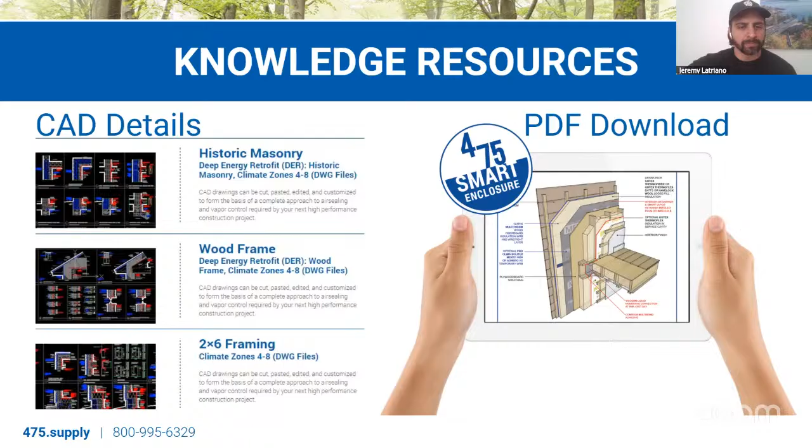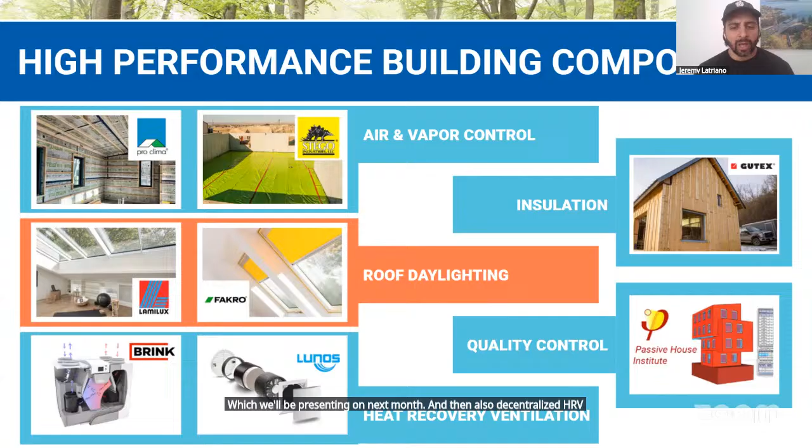At 475, we supply a variety of different solutions: air and vapor control through Pro Clima and Stego, insulation through a German manufacturer Gutex of wood fiberboard insulation products. And when we build to a very high degree of air tightness, we need to ventilate mechanically. So 475 supplies centralized ERV systems through Brink, which we'll be presenting on next month, and also decentralized HRV solutions through Lunos. But today I'm here to talk to you about our roof daylighting product specifically.

To learn more about our roof daylighting products and see a variety of different photos, project examples, blog posts, etc., I recommend checking out our Daylight website, 475daylight.com. I'll get into more about these products towards the end of the presentation, introduced via a case study on our new headquarters. But for now, I just want to give you the URL and encourage you all to check out the website when you have a chance.

So getting into the presentation, high performance roof daylighting. As a starting point, we like to define some of the terms we'll be using frequently in this presentation, starting with high performance - something we reference very often, something that's in our company name, but something that's kind of vague in general. So generally when I give this presentation, I like to open it up to the group and ask you to give some characteristics of what you would expect from a high performance building. If you are so motivated, you can do so in the chat and I'll call out some of your answers.

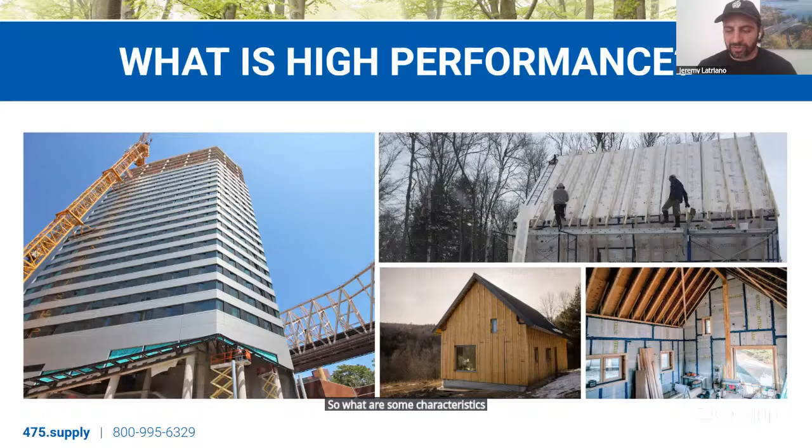So what are some characteristics of high performance buildings? Well, at 475, some of the characteristics we expect from high performance buildings are listed here. I see Vincent in the chat mentioned no leaks - that's a big one. Both water control, stopping water leakage which would affect the durability of the structure, and also air leaks - preventing drafts and air leaks through very high degrees of air tightness is the most effective way we can reduce heating and cooling demands.

Reducing air leaks will also have disproportionate effects on vapor control and thermal control. So yes, no leaks is definitely something our company advocates for strongly. Eliminating leaks and insulating continuously will also provide for very high levels of comfort. So high performance buildings are generally very comfortable when we reduce or eliminate drafts and have continuous insulation with minimal thermal bridges - we have very consistent interior surface temperatures, eliminating cold spots and temperature asymmetry, creating a very comfortable interior.

In addition, because these high performance buildings provide a very high level of air tightness, we're able to regulate very intentionally how much air enters and exits our building, and we're able to bring that air in through our mechanical ventilation system, thereby continuously filtering that air while also exhausting stale air. So these buildings generally have very high indoor air quality and more healthy interiors for that reason.

Perhaps an obvious one, but energy efficient is definitely something high performance buildings offer. When we air seal continuously and insulate continuously, we're mitigating heat transfer through the enclosure, which reduces strain on our mechanical heating and cooling systems.

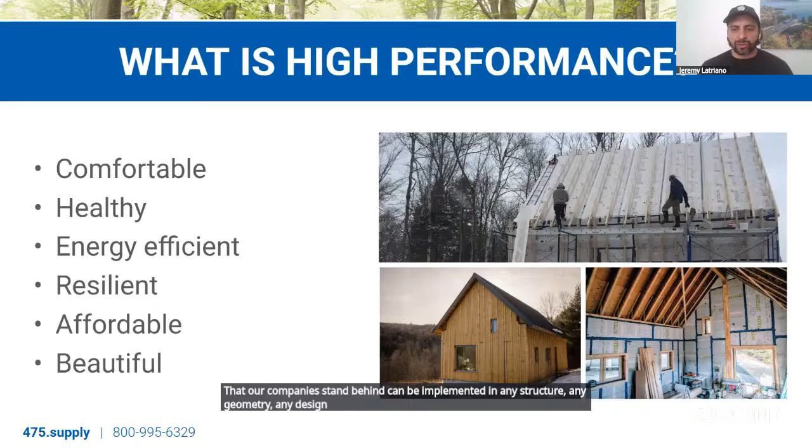And then beautiful - there's no reason high performance buildings can't be beautiful. All of the principles that we advocate for, the passive house principles our companies stand behind, can be implemented in any structure, any geometry, any design for the most part. So there's no reason high performance buildings need to be limited in their design.

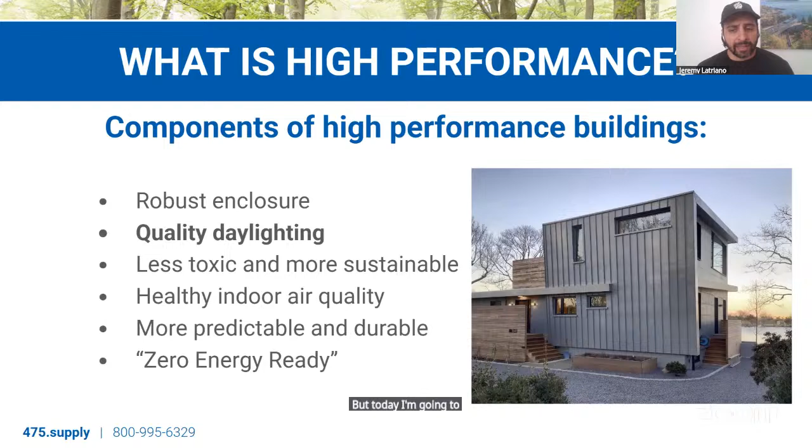There are various components of high performance buildings that allow us to get these high performance results. You can see them listed here on the slide, but today I'm going to talk primarily about quality daylighting. Let's go ahead and define that term in our next slide.

Just defining some of these elements of quality daylighting quickly: one, we want to ensure when designing for quality daylighting that we have a balanced window to wall ratio. Anytime we put a penetration in our enclosure, whether for a window, door, or skylight, which we're going to talk a lot about today, we are inherently weakening the thermal performance of this enclosure.

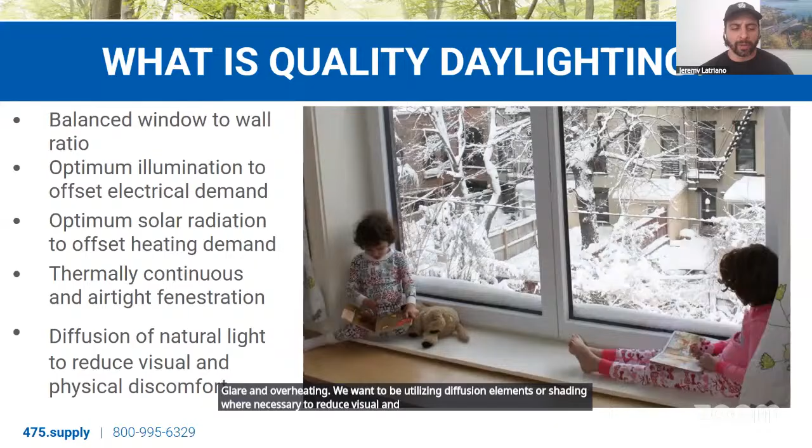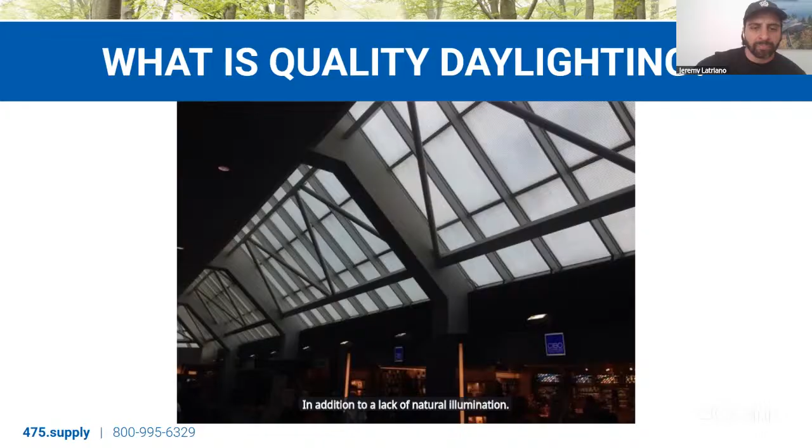So why do we utilize daylighting in architecture and construction? There are a variety of benefits, but one of them is health and productivity for our tenants. As human beings, we are very in tune with our circadian rhythm, which allows us to feel more energized during the day and sleep better at night, and is largely reliant on the pattern of the sun and light throughout the day in order to be reinforced effectively.

So when we have access to natural light in our day to day, we'll feel more energized at work, more rested at night, and it'll definitely benefit us physically and cognitively.

There are various examples of the benefits of natural light, such as students who have access to natural light during exams being shown to be more attentive and perform better. Shoppers at retail locations with access to natural light tend to spend more time in store and spend more on products. This is partially because of the pleasantness of shopping in a place with natural light, and partially because natural light allows us to see the full spectrum of visible light, which lets us more accurately visualize the colors represented in a given product.

This same quality of natural light and its ability to let us visualize the full spectrum of visible light also creates excellent aesthetic and architectural benefits. Natural light allows us to capture very specific qualities of light within a space and really give a space a specific feel based on how we introduce natural light into it.

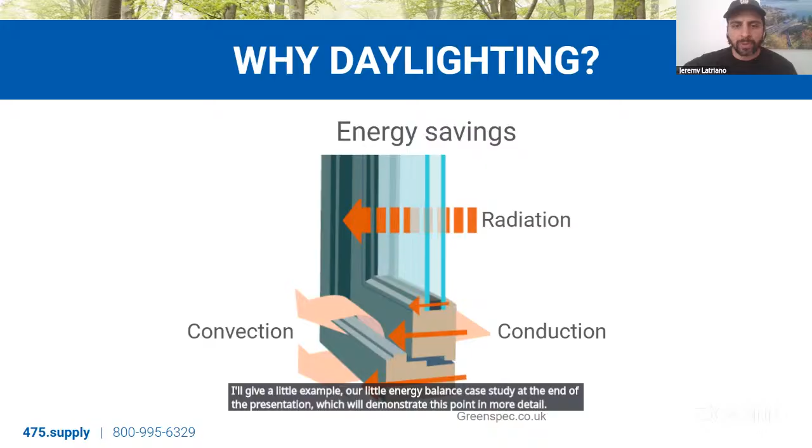So why roof daylighting specifically? Well, roof daylighting skylights are ideally positioned to capitalize on the benefits we've already discussed: health and productivity, aesthetic and design, and energy savings. Because they're positioned on the roof, oriented directly towards the open sky, they receive much more direct daylight and much more light in general throughout the day and throughout the year.

In addition, skylights in particular are well suited to capitalize on the benefits of natural ventilation, both by taking advantage of the stack effect, or the tendency of warm air to rise in our buildings when it's able to escape from higher stories, and also by capitalizing on nighttime flushing, particularly relevant in shoulder seasons to flush heat at night and reset our mechanical systems for when the space is in use the next day. Finally, skylights, particularly in urban applications, are ideally suited to allow for exterior access by opening up towards the roof, which could be difficult to achieve in particular urban locations without providing that access.

So here we have a nice image of a LAMILUX product, the Comfort Swing, which is featured on our office here at 475. I'll talk a little bit more about this product later in the presentation. But essentially, because of this product, we have access to our roof deck — a connection to the outdoors that we would not be able to achieve without a roof daylighting element.

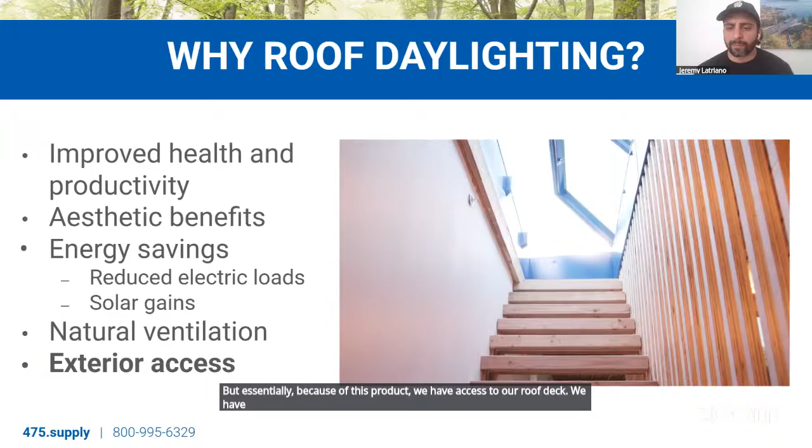So let's look a little closer at the relationship between skylights and windows. Because skylights are positioned towards the open sky, they are better situated to receive direct light and more illumination and heat throughout the day and throughout the year. For this reason, skylights can be much smaller than windows while still capturing similar amounts of light.

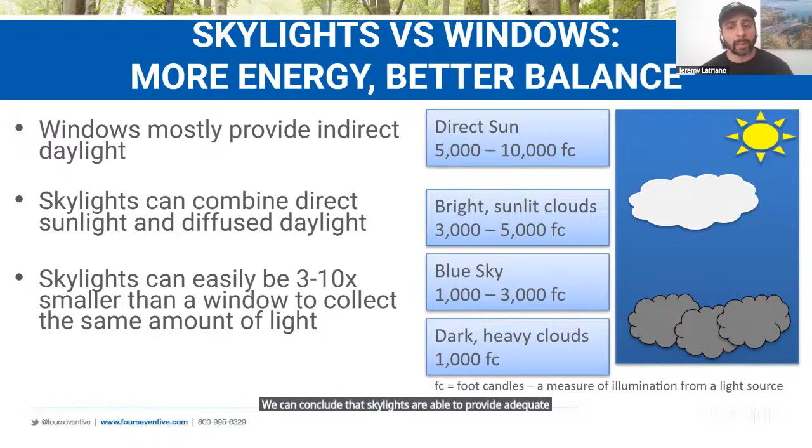In the image on the right, we can see the illumination from the open sky in various weather conditions. On a direct sunny day, illumination is typically measured at 5,000 to 10,000 foot candles from the open sky. But even on a stormy, dark, heavily clouded day, we still get illumination from the open sky around 1,000 foot candles. When we consider that office work typically requires less than 100 foot candles to complete comfortably, we can conclude that skylights are able to provide adequate illumination to significantly impact our electrical demands and thereby the energy usage of our buildings.

Windows, generally speaking, as a rule of thumb, allow light to penetrate about 2 times the head height of the window into the interior space. In the image at the top right, you can see a window in an open space, and that window is allowing for some natural illumination, but primarily in the spaces directly adjacent to that window. If we add a clerestory or a light shelf to the window, we can reflect light deeper into the space, about 2.5 times the head height of the window approximately.

But we're still not able to evenly illuminate the space as much as we might want to. People directly adjacent to this window will have great access to natural light, but as we get deeper into the space and further from our exterior walls, that natural illumination will not be as present. When we utilize skylights evenly throughout a space, particularly with splayed light wells or curbs that allow light to penetrate deeper into the interior, we can evenly distribute light throughout the interior, even to spaces that might not be directly adjacent to an exterior wall. So skylights can allow for natural light to reach spaces that might otherwise be difficult to achieve.

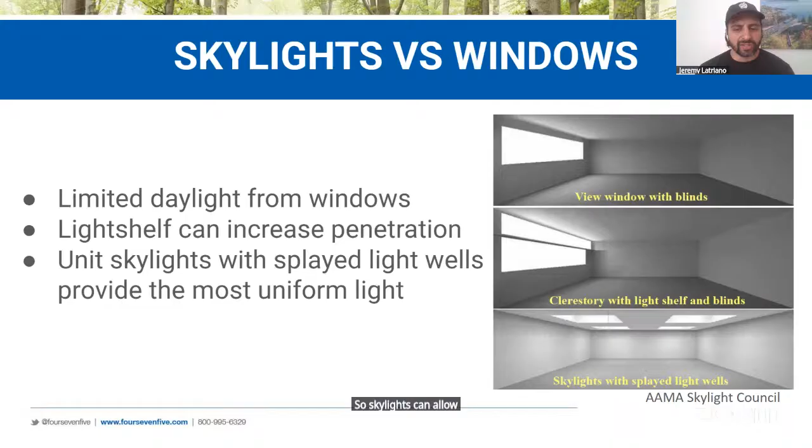However, there are certainly common problems associated with roof daylighting. Because they do get so much direct light, they are susceptible to over illumination or glare, which can create visual discomfort and make it difficult to complete work comfortably, or even to just rest comfortably.

In addition, this exposure can create overheating, particularly in the summer, as we gain solar radiation that can negatively impact our cooling demands. In addition, if our skylight solutions are not thermally broken, we have very warm exterior temperatures in the summer, and that heat can be transferred inward, which will also have an impact on interior comfort and cooling demands. In the winter, we can see the opposite effect, where we have very cold exterior temperatures. If our skylight is not thermally broken, we can see heat rise to our ceiling level and then be transferred outward via the skylight assembly.

What can occur when exterior temperatures are quite cold is condensation, as the interior surfaces of a skylight can become quite cold when the solution is not thermally broken. Since we're spending most of our time in the winter indoors cooking, cleaning, showering, breathing, we're generating lots of moisture. This warm, moist air at the interior will rise again, come into contact with this cold interior surface of the skylight, and can then condense and create condensation — sometimes perceived as a leak, but often this moisture is in fact due to the effects of heat transfer and thermal bridging.

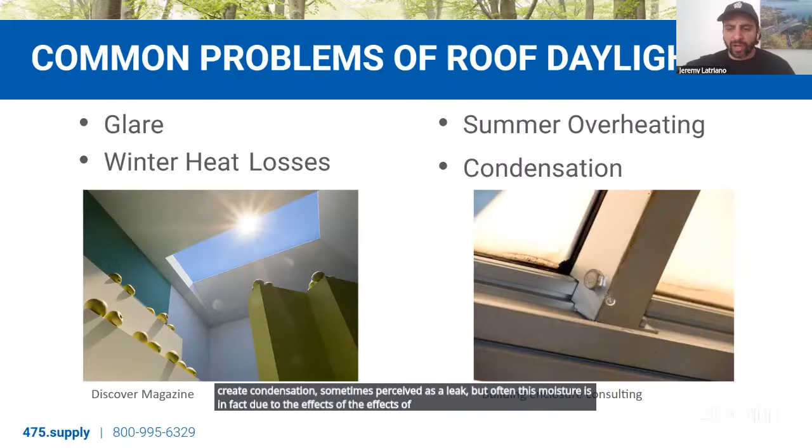Looking a little closer at some of these comfort drivers, first, uniform surface temperatures. Here we see an example from Nick Grant. He was in his office and the air temperature was 23 degrees Celsius, which is a little warm, but right around room temperature. However, Nick felt like there was a radiator on in the space and he couldn't figure out why.

So he took out this thermal imaging camera and photographed the skylight on the left and the windows on the right. What he realized is that the interior surface temperatures of these fenestration elements were much warmer than the surrounding air temperature. This is because we're most likely in the summer season, so exterior temperatures are very warm. Because the skylight and windows are not thermally broken, that heat from the exterior is transferred inward, making the interior surfaces much warmer than the interior air temperature, and that heat radiates inward, creating the effect of a radiator or heat source.

Here we can see that the interior surface temperatures of these fenestration elements were measured at 50 degrees Celsius, and just below that number, which is almost twice as warm as the air temperature in that space. So this is problematic for comfort and also for energy usage.

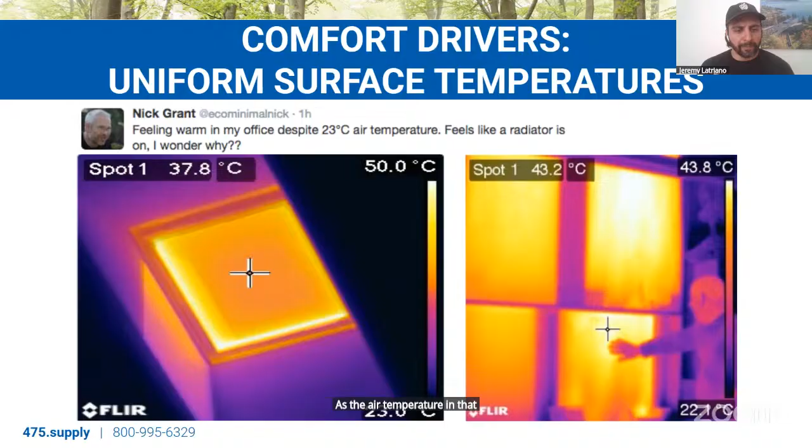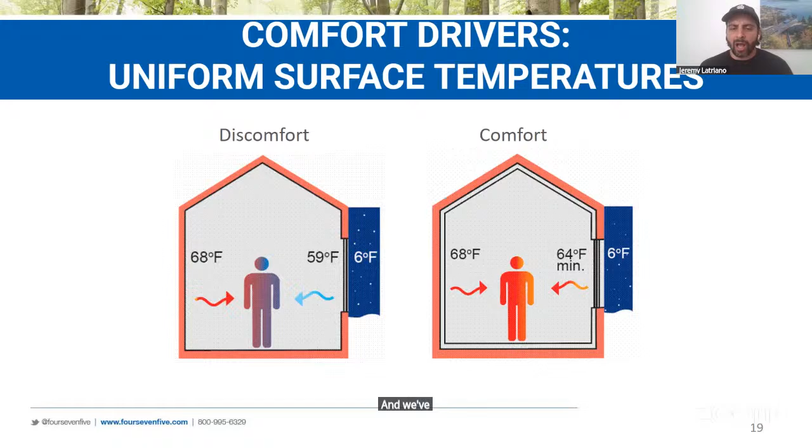I want to talk a little about design considerations for skylights and fenestration in general, starting with detailing. Fenestration, skylights, windows, and doors are unique in that they're really the only element in our enclosure providing for all four control layers.

Getting into those control layers, in order of importance, they are: water control. If we can't prevent water leakage or water from entering our structure and interior, our buildings are going to be barely habitable. They're not going to be durable or built to last, and they're really not going to be serving their primary purpose.

After water control, air control is of next most importance, because as mentioned at the beginning, air control has the most significant impact on heating and cooling demand and will also disproportionately affect vapor and thermal control. After air control is vapor control in order of importance. We won't get too much into vapor control here because fenestration is typically vapor closed, and vapor movement isn't a big factor once we've eliminated air movement. However, we do want to be considerate of thermal control and how we connect our thermal control in our opaque assemblies to our fenestration, to provide thermal continuity and minimize thermal bridging.

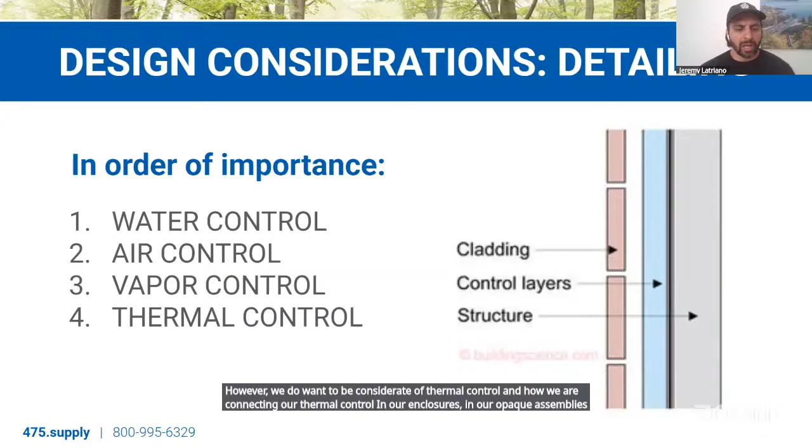What's nice about the Lamilux skylights specifically that we supply is that they're available with insulated curbs as part of their assembly. This insulated curb allows for simple and intuitive detailing for connection of the control layers in our roof to our skylight. As we can see in this section drawing, the insulated curb of the skylight is set down on the roof deck or sheathing, and the exterior insulation just outboard of that sheathing runs directly into the side of the Lamilux's curb.

This will ensure that the thermal control is continuous from the roof to the skylight curb, and since the Lamilux skylights are thermally continuous with insulation at their frames, warm edge spacers, and triple layer glazing, we can be confident that thermal continuity will continue over the full roof opening.

This blue line at the exterior of the section drawing is a roofing membrane, or primary flashing control layer, or water control layer. This membrane runs from the roof and connects directly to the side of the curb, terminating about 1 inch from the top of the curb, just underneath the skylight's drip edge. That ensures we are continuously watertight from the roof to the skylight assembly. Since these skylights are extremely airtight and watertight, we can be very confident that our install will perform and provide water control throughout the lifetime of the product.

At the interior, which is 475's recommended location for an air control layer, the Intello Plus is specified and called out with this red line running at the ceiling up to the base of the skylight. Again, because these skylights are airtight and because we have this insulated curb, all we have to do to ensure continuity of air control between the roof and the skylight is connect our air control layer, in this case the Intello Plus airtight membrane, to our curb at any location.

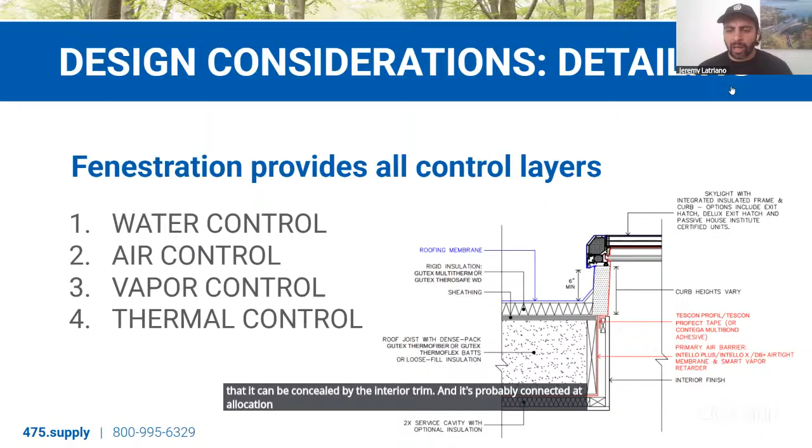Looking a little closer at thermal control specifically, placement and alignment really matters. Here we're looking at an example of a window installed in the same wall assembly, in 3 different positions within that assembly. For this example, we'll assume the thermal control layer, or insulation layer, is centered in our wall assembly. So we want to align the thermal control layer in our window, assumed to be thermally continuous, with the thermal control layer or insulation in the surrounding wall.

In the image on the left, we can see this is a thermal model. Each color shown here represents a different temperature strata, and we're basically looking for any indicators that thermal bridging is occurring, which would be shown by colors kinking, bleeding, or moving through this wall assembly and window.

In this example on the left, where the window is installed outboard in the wall assembly, we can see there is some heat transfer occurring between the thermally continuous window and the thermal control in the wall assembly, because the window is out of alignment with that thermal control layer. So thermal bridging occurs around the perimeter of the window, and we see cooler interior surface temperatures for that reason, which could indicate thermal asymmetry, creating discomfort, and potentially, if significant enough, condensation.

In the example on the right, we've now set the window all the way inboard, but the same problem persists. The window is out of alignment with the insulation in the wall, so again we're experiencing significant heat transfer between the window and the wall assembly, and we're compromising the thermal performance of this install.

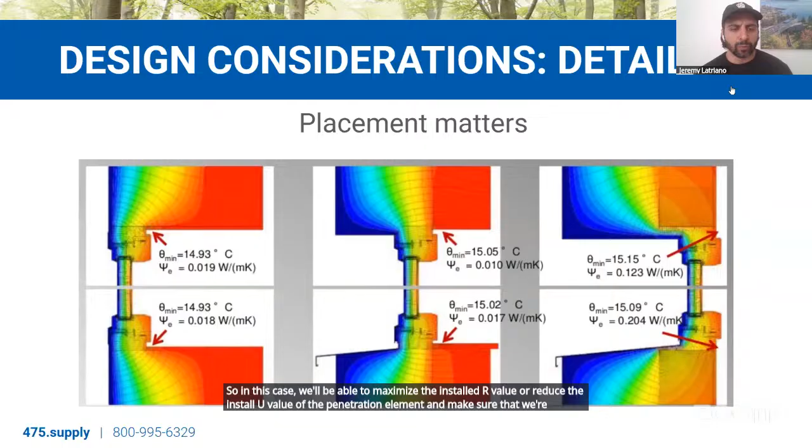So the same principles apply to skylights. Here we see the Lamilux FE skylight, a very similar section to what we looked at previously. The Lamilux FE skylight is thermally continuous, so for the most part there's no thermal bridging occurring through that assembly. In this example, the insulated curb of the skylight is embedded in the exterior insulation of the roof structure, and for that reason this install is thermally continuous. Again, our interior surface temperatures are maintained throughout the roof opening and our exterior temperatures, so very little thermal bridging occurs either through the skylight assembly or between the skylight and the roof.

So in order to optimize thermal install values, the first step would be utilizing a thermally continuous solution. If we don't have a thermally continuous solution, I won't say it doesn't matter how we align the window or skylight, because there still will be performance differences in where it's placed. But overall, the solution won't provide for thermal continuity, so we'll experience some heat transfer over the opening. Once we've specified a thermally continuous solution, we just want to align the thermal control layer in the skylight with the thermal control layer in the roof, and those insulated curbs make that part quite simple.

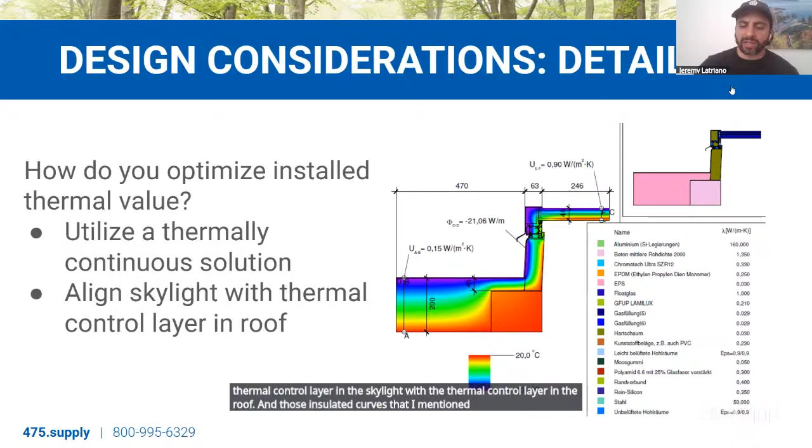Thinking a bit about U values and some product considerations for fenestration. U values for a window, door, or skylight are a weighted average of each element or material in the assembly. Generally speaking, the U value for the glass is going to be significantly less than the U value for the frame. So when sizing our windows or skylights, we want to consider this, and that larger skylights, which will have the frame representing a lesser percentage of the overall assembly compared to the glass, will generally have a lower U value than smaller units.

So in addition to the glass and the frame, we also want to consider the spacer. For a high performance solution, we want to select something with a warm edge spacer, a spacer made from a non-conductive material, which will prevent heat transfer from occurring between the frame and the glass.

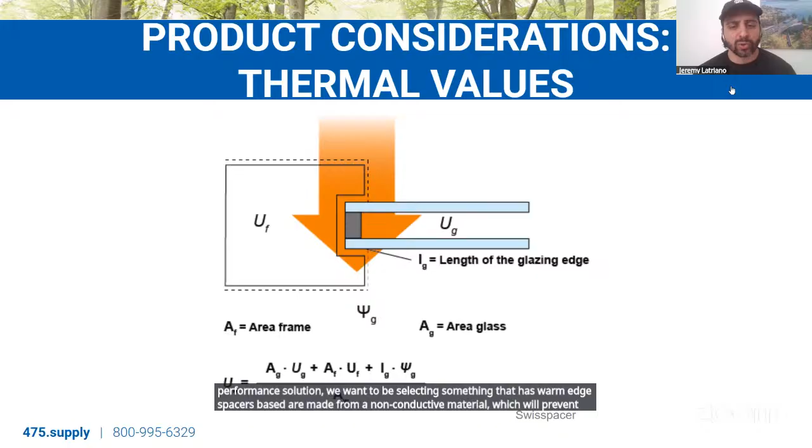So what does this look like for a skylight assembly? Again, looking at a Lamilux FE, which is a thermally continuous solution that virtually eliminates thermal bridging, we can see the triple layer glazing with exceptionally low U values. This glazing is always specified with a warm edge spacer, so we can be confident that we're mitigating thermal bridging between the glass and the frame. The frame itself is aluminum at the exterior, but insulated continuously at its core, so we're reducing or mitigating heat transfer through that frame, which will significantly reduce or almost eliminate the possibility of condensation, as well as maintain consistent interior surface temperatures. Finally, these skylights are prefabricated on insulated curbs, which ensures we are thermally continuous from the skylight to the surrounding roof.

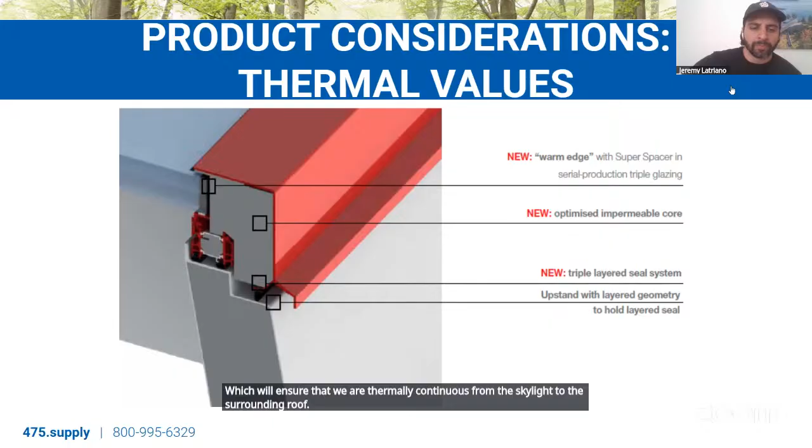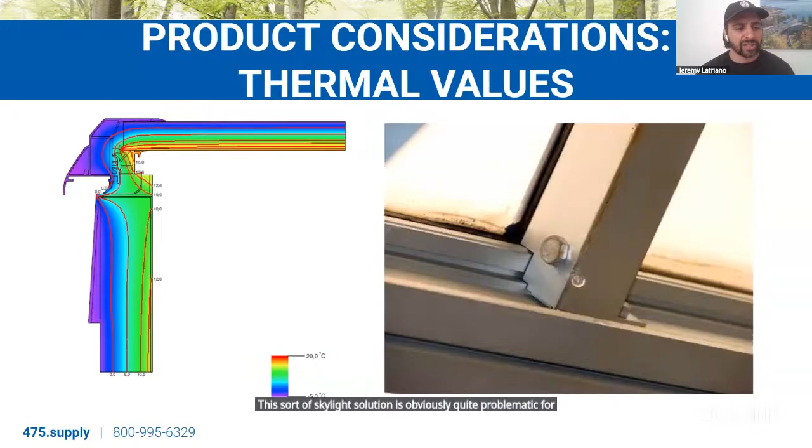Many manufacturers don't even plan to eliminate heat transfer. They basically admit that their skylights are not thermally continuous and do contain thermal bridging. Instead of preventing condensation, they just plan for it, often by providing interior gutters where condensation might occur, which weeps to the exterior via weep holes in the skylight assembly. This sort of skylight solution is obviously quite problematic for high performance buildings, as it introduces thermal bridges and also compromises air control.

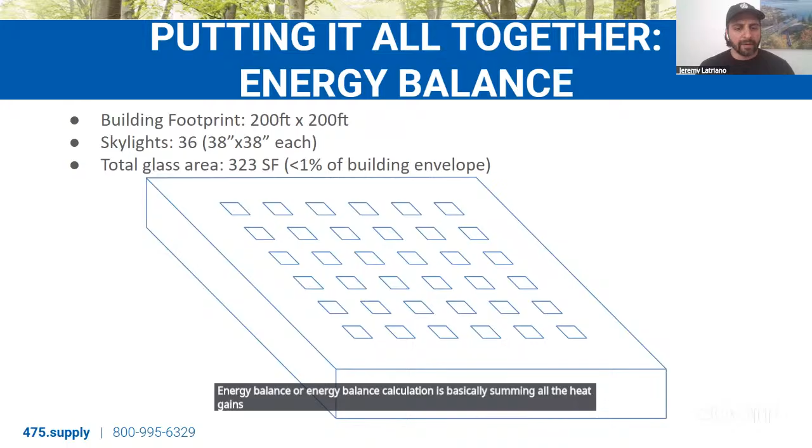So now I want to get into an example of how skylights affect the energy balance of a building. As mentioned at the beginning of the presentation, an energy balance calculation is basically summing all the heat gains in our building - convection, conduction, and radiation - as well as any interior gains we might experience from appliances or electronics and that sort of thing. We then deduct from that sum of heat gains the heat losses, and the energy balance, or the sum of all our heat gains and losses, will help us determine how much heating or cooling we need to offset the heat transfer that might occur.

For this example, we're going to be looking at this rectangular prism of a building, masterfully created in MS Paint. This building has a footprint of about 200 foot by 200 foot, with skylights represented by these smaller rectangles, 36 of them total at 38 inch by 38 inch. The total glass area for this example is 323 square feet, which is less than 1% of the overall building envelope.

Over the next several slides, we're going to be looking at the impact that these 36 skylights have on the energy balance or energy demand of the building. So let's look at some data here.

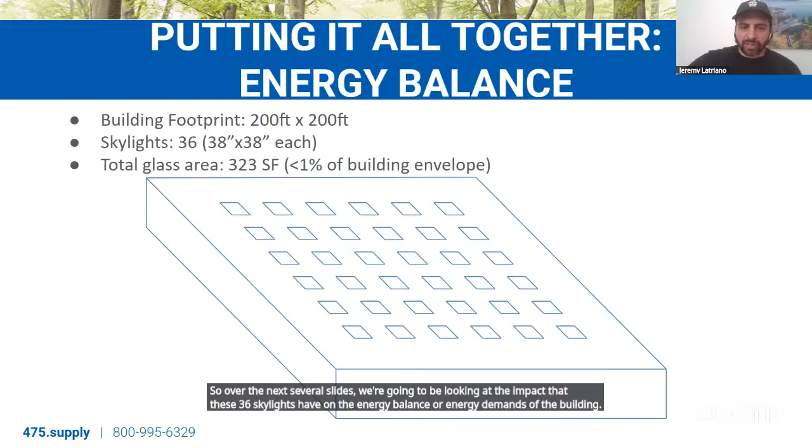First, we're looking at the effect of the skylights in our hypothetical building during the winter. As I mentioned, in New York City, in New England, and in much of the United States, we are in a heating dominated climate, so most of the operational energy that our buildings use is used to generate heat. We're looking here at the effects that the skylights have on heat gain and heat loss and energy balance in the winter months.

Each column in this chart and the corresponding table below represents a specific skylight assembly, as labeled along the x-axis. On the far left, we can see a double pane skylight solution. It's not thermal bridge free, it doesn't have curb insulation, and it has a relatively high U glass value.

In this case, in the winter, we're going to see heat transfer via conduction through our skylight assembly because it's not providing great thermal protection, and we're going to have significant heat losses through the skylight assembly for that reason. These heat losses will be partially offset by solar gains, or the radiation we receive through the glazed surface. But in this case, the heat losses greatly outweigh the solar gains, and we're going to have to generate heat mechanically to offset those heat losses and ensure a comfortable interior.

As we move through these columns, we improve the performance of the skylight steadily, first by reducing the U glass value, then by providing a thermal bridge-free solution, and then by adding curb insulation and further reducing the U glass value. As we improve the thermal performance of the skylight assembly, we reduce conductive heat losses, maintain the solar gains, and get to a point where the conductive heat losses are less than or roughly equal to the solar gains.

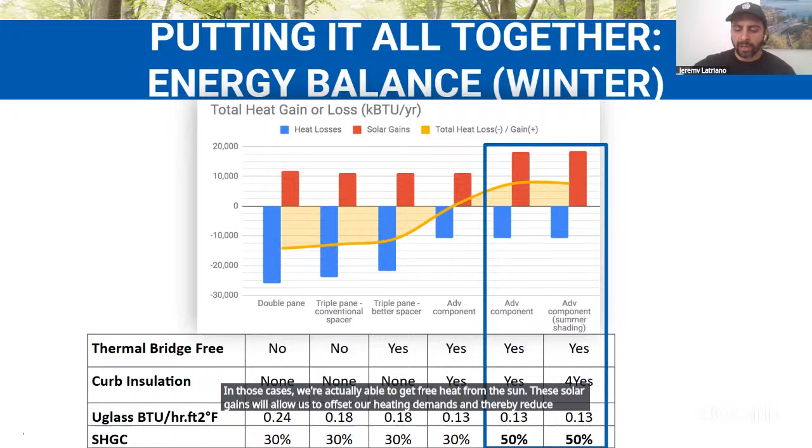In this case, because there's so much more conductive heat loss than solar gain, the heating demand for the building will actually increase, requiring about 6% additional mechanical heat to offset our conductive heat losses. But as we improve the performance of the skylight, thereby reducing the conductive heat losses, we're able to get to a point where they are roughly equal to the solar gains, which is a net neutral impact, or 0% effect on the heating demands.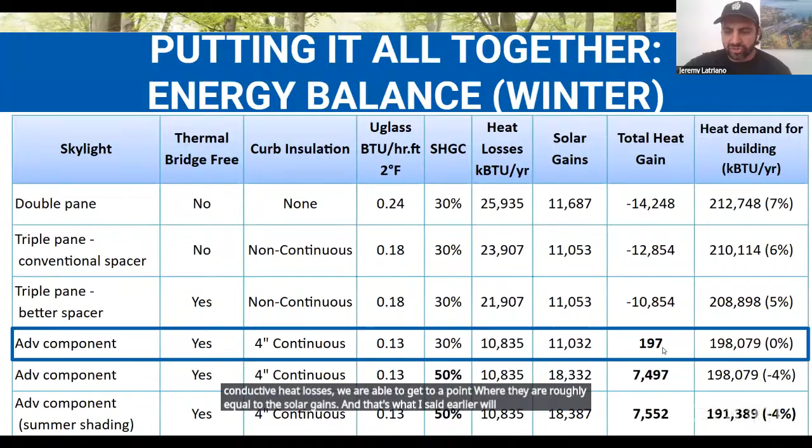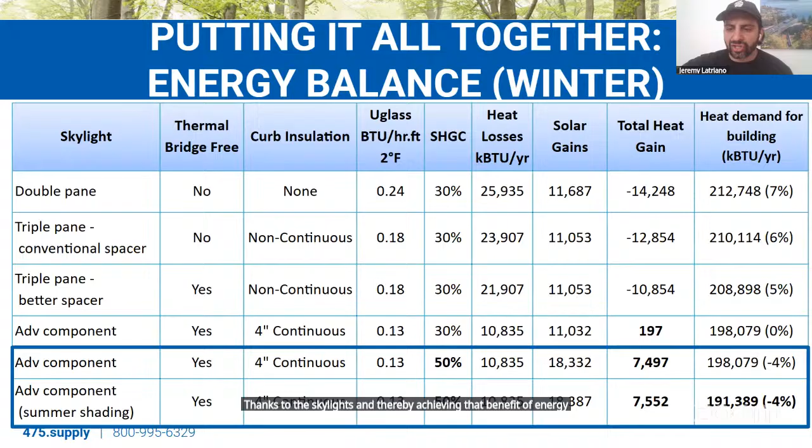We then take it one step further, increase the solar heat gain coefficient, and we're actually able to get to a point where we're reducing the heating demand of the interior by about 4% thanks to the skylights, thereby achieving that benefit of energy savings that I mentioned early in the presentation.

However, in most climates, definitely New York City and most of the United States, in addition to a heating season, there's also a cooling season. When we're in the summer, or even in the spring in some cases, we're generating cool air mechanically in order to maintain interior comfort.

We also want to consider the effect skylights have on the energy balance during the cooling season. We'll look at the energy balance first considering conductive heat transfer, and then look at the energy balance for radiative heat transfer in the slides that follow.

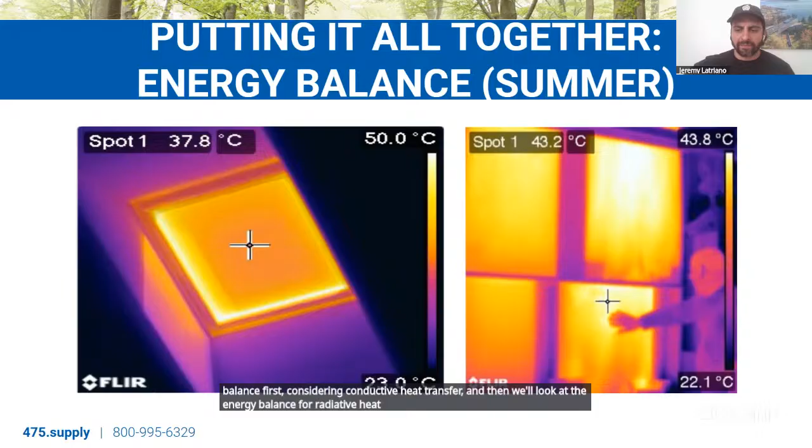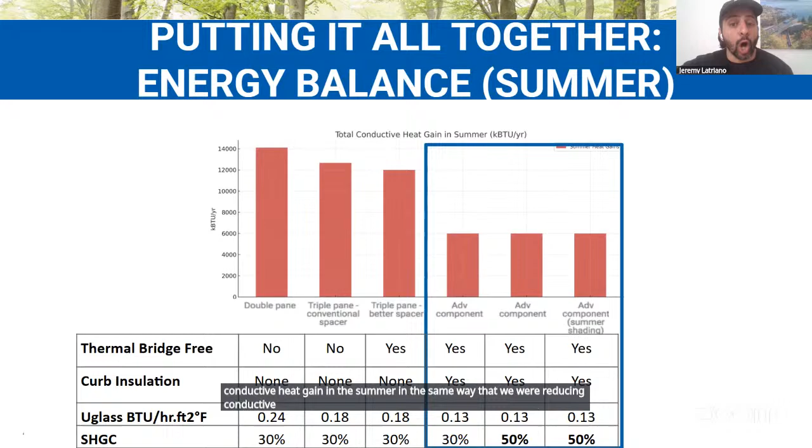Looking at the same table with the 6 skylight examples, as we move through and improve the performance characteristics of the skylight, we're reducing conductive heat gain in summer in the same way we reduced conductive heat loss in winter. We're able to significantly reduce heat gain by conduction by about 57%, just by going from some of these lower performing solutions to a more advanced component.

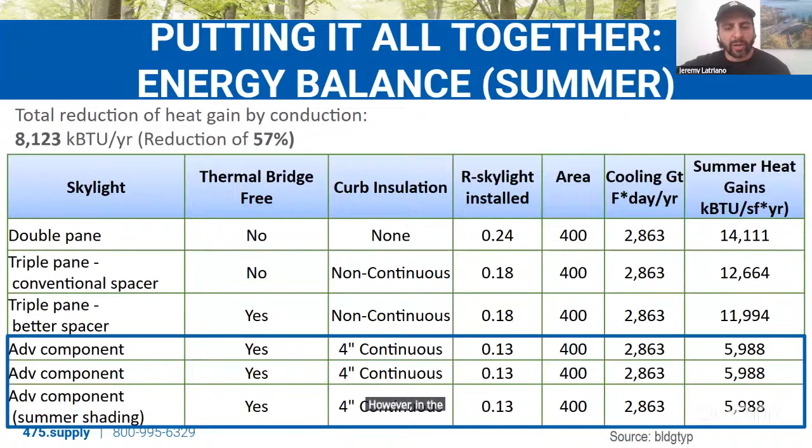I don't have a chart for this data, but we can see the impact of radiation on our cooling demand during the cooling season. In our lower performing solutions, we get a certain amount of solar gain due to the 30% solar heat gain coefficient. When we increase that solar heat gain coefficient to 50% to reduce heating demand during heating season, we're also going to increase cooling demand for the same reason during cooling season.

For this reason, we have this final row at the bottom of the table: advanced component with summer shading. This is the best of both worlds. By utilizing shading, ideally at the exterior, we can significantly reduce heat gain when we don't want it during the cooling season, reducing total heat gain by radiation by about 33%. We're not quite getting to a net neutral or net positive effect from our skylights in this cooling season - that would be impossible - but we are able to significantly reduce the impact.

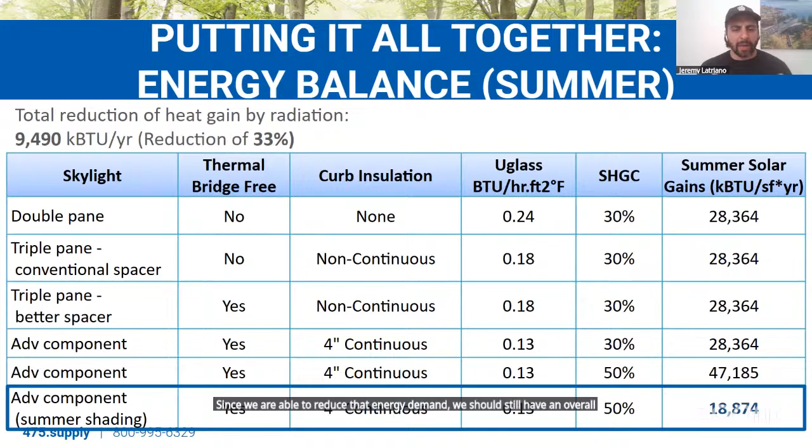This masonry building was originally constructed in 1886 as a residential space on the top 2 stories over a retail space in the garage below. It was a wagon house at one point, stored ice cream trucks for a while, and then was essentially a parking space when we purchased the building in 2023.

Our goals for the renovation were to provide an office space using largely existing masonry and newly installed timber structure via nail laminated timber and timber joists. We also wanted to achieve Passive House certification, both via PHI and PHIUS, which required careful optimization of the enclosure.

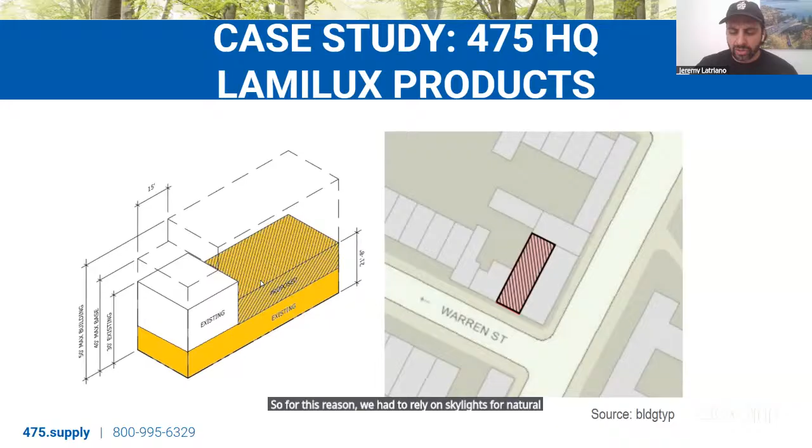Similarly, at the front of the building, we have an existing residential space, which also prevents the possibility of windows in the front of our office, shown here in the hatched yellow. For this reason, we had to rely on skylights for natural light. We actually modeled our Bldgtyp - our passive house consultant modeled the amount of illumination our space would receive from the few windows we were able to utilize, as well as the skylights.

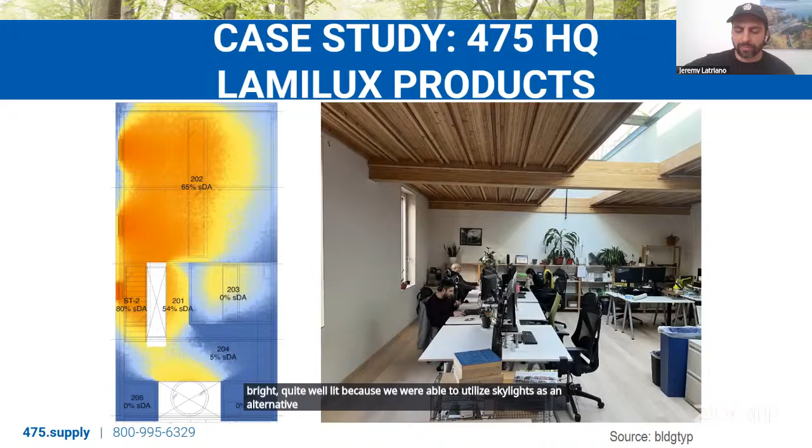I think this project does a really nice job of introducing some of the skylights I talked about earlier in the presentation. We only have the Lamilux skylights here, not the FAKRO skylights. It's our new office, so I'm going to talk primarily about them and how we used them in the structure, and then also touch on the FAKRO products at the very end.

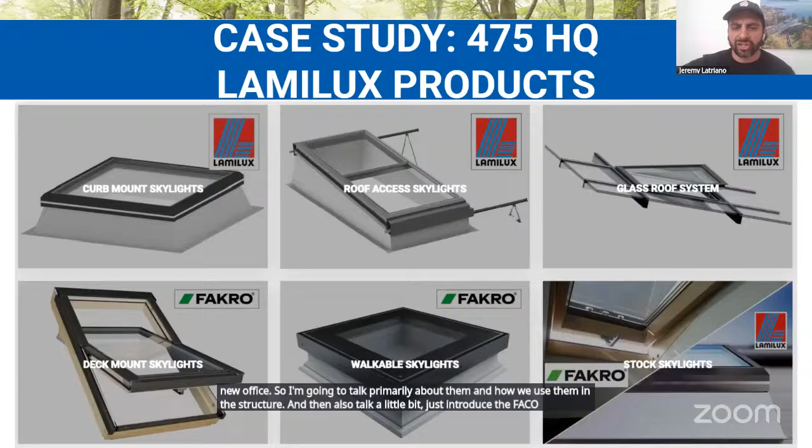The first product I want to introduce is the FE Circular, one of our curb-mounted unit skylights. These unit skylights are pre-assembled, coming with everything you see in the section drawn on the right: insulated glazing, thermally broken and insulated aluminum profiles, and insulated curbs. We'll talk a little more about that in a second.

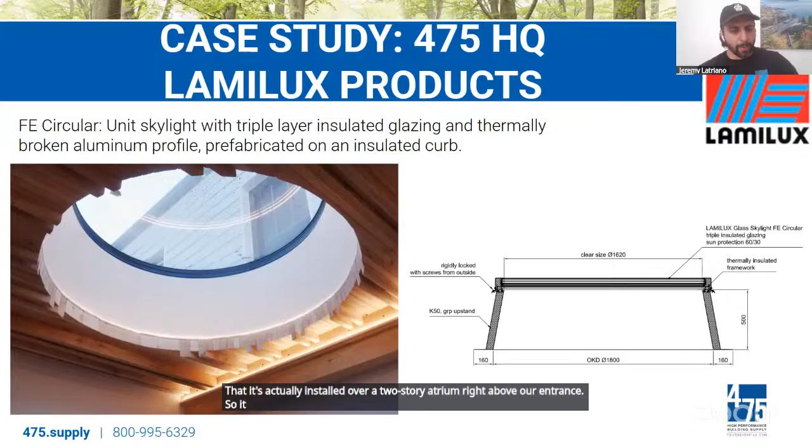FE Circular in this case was chosen because we think it provides a nice design element with its circular geometry. It's actually installed over a two-story atrium right above our entrance, so it brings natural light to both stories of the building, as opposed to just the top story. These FE curb mount skylights are available in a few different varieties, which I'll talk about next.

To give some basic properties, as I mentioned, they are pre-assembled, so they arrive ready to install. They typically have triple pane glazing with exceptionally low U values, suitable for passive house certified projects, such as the EnerPHit certification we're looking to achieve on our new office. They have a thermally broken frame, which you can see here in section in the bottom right, along with thermal models given here. Again, we can see the heat transfer through this assembly is largely prevented.

They're prefabricated on insulated curbs in standard sizes, but also available in custom sizes for attachment to a site-built curb. These FE skylights can be fixed or operable, but they're intended primarily for flat or low pitch applications up to about 25 degrees, or 6:12.

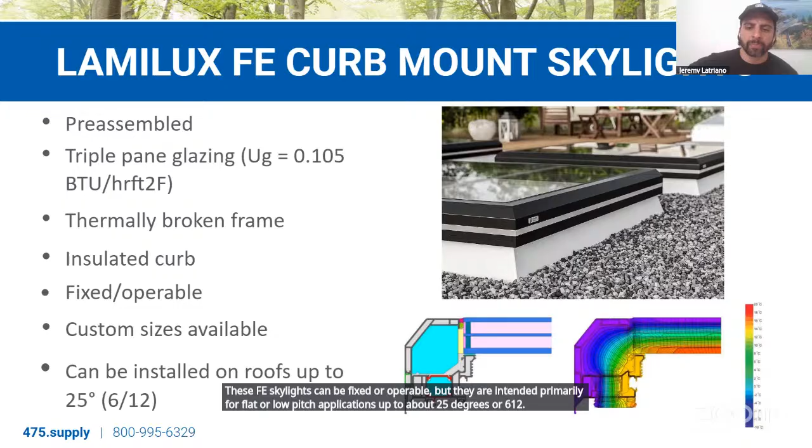Looking a little closer at these curbs, primarily because I think they're a pretty unique feature of the Lamilux skylights that allow for excellent thermal control in high performance enclosures. These curbs are available from Lamilux in a variety of heights. You can see the K curbs shown here in the top left, available with heights of 6, 12, 16, or 20 inches, with a wider splay to allow light to penetrate deeper to the interior.

We also could supply a Fit 6 curb, with a height of about 8 inches, shown in the bottom left, which has a narrower splay, which could be a design choice for certain applications.

The height of the curb for these Lamilux FE skylights is dictated primarily by the thickness of the roof assembly. As we can see in the section drawn on the right, ideally in a best practice install, this Lamilux curb is embedded in the exterior insulation layer of the roof to provide continuous thermal control. We need to maintain 6 inches of clearance from the roofing or flashing layer, where water will collect, to the top of the curb.

So for buildings that have thicker exterior insulation, we'll have to have a taller curb to maintain that clearance. But in this case, we were able to utilize, as shown in the section drawing, the Fit 6 curb with a height of 8 inches, while still maintaining that 6-inch clearance requirement.

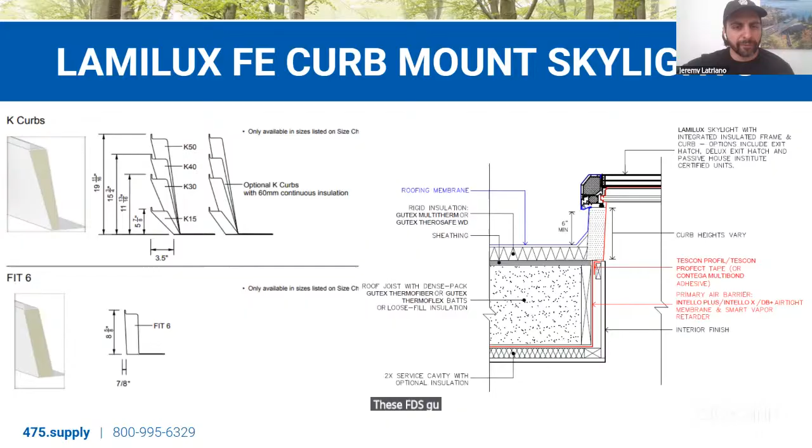These FE skylights are available in several different varieties. There's the standard FE, our bread and butter unit skylight, available in rectangles up to about 4.5 feet by 10 feet, or about 6 feet square. We can see one installed here on a brownstone in Brooklyn, where the frame is brushed aluminum. That frame, however, can also be powder coated in any RAL color.

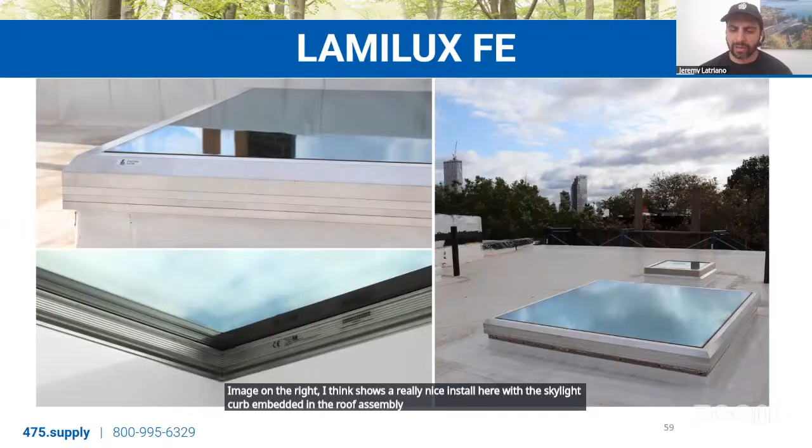The image on the right shows a really nice install with the skylight curb embedded in the roof assembly, then flashed continuously from the roof to the curb, providing excellent water control as well. In addition to the FE, there's also the FE 3-degree, which has virtually the same assembly but also includes an integrated 3-degree slope for roofs that are particularly low slope or flat.

This can be a nice choice to ensure that you're allowing for efficient shedding of water and snow, and that water or snow will not pond or collect on the surface of the skylight over time, which can create additional requirements for cleaning and maintenance.

Then there's the FE exit hatch, which is particularly relevant in urban applications. In New York City, it's a requirement for many residential buildings. This is basically an FE equipped with pneumatic pistons and a lockable latch, as shown in this image, that opens manually to an angle that allows you to climb out of the skylight and onto the roof. This sort of solution is typically utilized over a ladder.

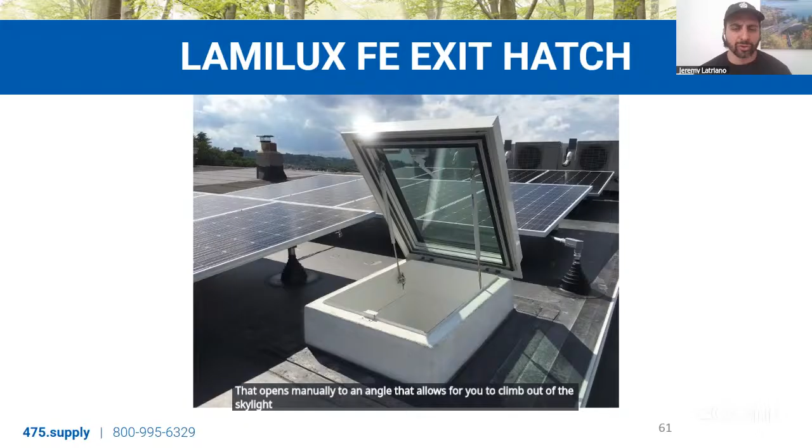There's the FE circular, which is the product featured in our office. Again, a prefabricated solution only available in standard sizes, up to almost 8 feet or about 7.5 feet in diameter. A nice design element for applications or projects that need a little bit something funky or different. We have it in our office, and it's a really nice eye-catching fenestration element.

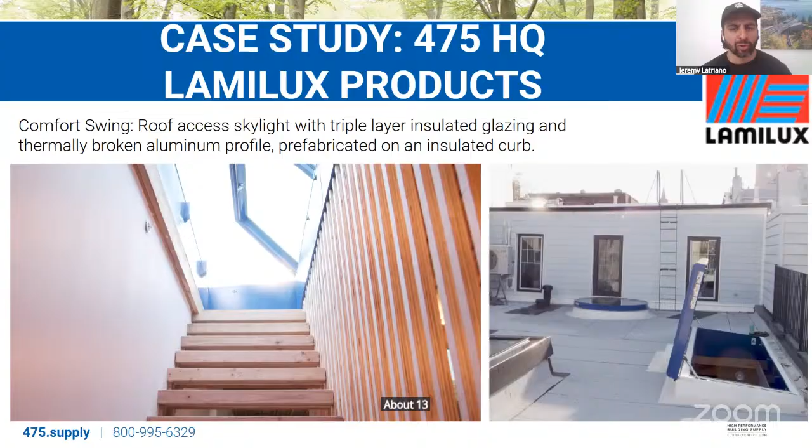And the final product I want to talk about through the lens of our new 475 headquarters, the Lamilux PR60. This is a glass roof system, otherwise known as a mullion and transom system, or a knockdown system.

Essentially, it's a curtain wall from the roof delivered to the job site as a kit of parts, which includes the triple layer insulated glazing units, the IGUs, the thermally broken aluminum profiles, which are continuously insulated, and then the insulated flashing connections to the existing structure, which will again provide for very high levels of quality control for thermal control between the skylight and the roof assembly itself.

You can see the details for the skylight or the PR60 install on the right. These are from the Lamilux shop drawings, which they provide for every skylight and every PR60. In this case, you can see that the profile itself is thermally broken. We'll look at that thermal protection and how that is achieved in a second.

There's this insulated flashing connection, which is going to protect that profile and provide thermal control outboard of that profile. And then we also have this mineral wool, which is supplied as part of the Lamilux scope, which is again going to prevent heat transfer through the aluminum profiles.

In this case, we installed the skylight itself over an insulated stud cavity, essentially, which served as our curb. And for that reason, this insulation is in alignment with the insulation in the curb, and we have excellent thermal continuity for this install. This PR60 also featured a vent flap, which you can see in the bottom of the image on the left, and also shown in section in the drawing on the right.

The windows on our office needed to be installed with fire protection windows outboard of them. And since there weren't fire protection windows able to provide for passive house levels of performance available, we basically have two windows installed, and the fire protection windows are not operable. So the only way that we were able to bring in natural air, fresh air via natural ventilation is through the roof access skylight, the Comfort Swing, and also via this ventilator flap as part of the PR60.

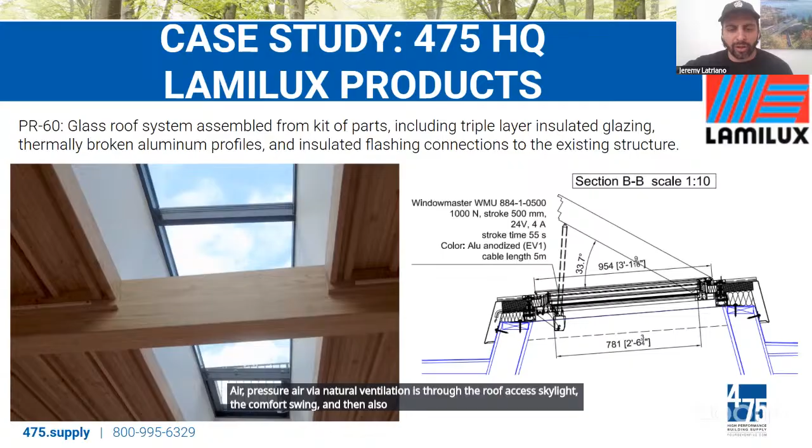Looking at the PR60 in more detail, you can see in this thermal model of the assembly that there's very little heat transfer occurring through the PR60. So there's very little risk, virtually no risk, of condensation occurring, and there's no gutter or weep holes required to manage moisture from condensation.

These PR60 skylights are fully customizable, so they can be installed on slopes as low as 2 degrees or as steep as 90 degrees, and we can integrate sloped glazing with vertical glazing as part of the assembly. We're able to provide very large glass fields, up to about 6 feet square or 10 foot by 3 foot, giving really nice sight lines given the narrowness of the PR60 profiles.

Because these skylights are more technically challenging, both in terms of engineering and installation, 475 provides a suite of services to support their successful implementation.

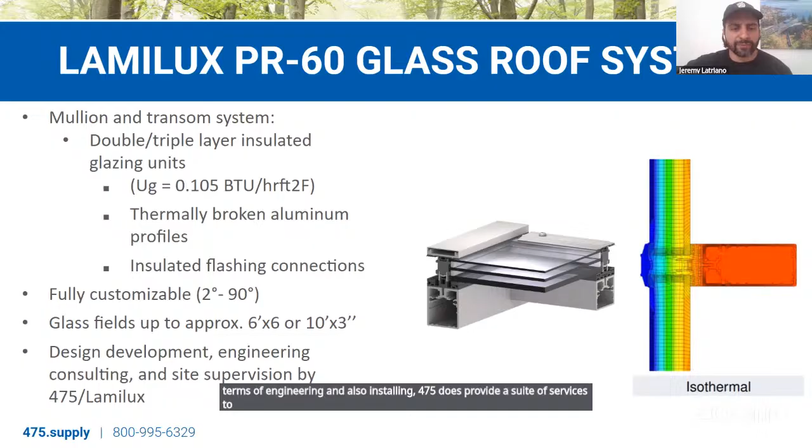Looking at the PR60 assembly more closely, here's a cross section through one of the profiles, with a triple layer glazing unit shown on the right, always with a warm edge spacer. The interior pane of all Lamilux skylights is always laminated, the exterior pane is always tempered, providing fall-through protection and preventing breakage or cracking to the greatest extent possible. Within the profile is a thermally optimized insulation core, a foam strip that runs continuously along all the profiles, which is the primary measure preventing thermal bridging.

At the interior and exterior of this insulation core are EPDM gaskets. The exterior EPDM gasket is our primary air and water control layer. Because the PR60 relies on a gasket rather than silicone for water tightness, we call it a dry glaze system, since no wet silicone is required. These dry glaze systems require less maintenance over time, since silicone connections can break down, crack, and degrade over the lifetime of a product, whereas gaskets are much more durable.

The secondary gasket at the interior collects any moisture that might penetrate through the exterior gasket. Because it's a dry glaze system, particularly during high pressure storm events, trace amounts of water can make their way behind the primary gasket, in which case it collects in these interior gutters of the secondary gasket. These gutters, or channels, are outboard of our air control layer, so they're able to passively ventilate or drain water to the exterior without compromising air tightness.

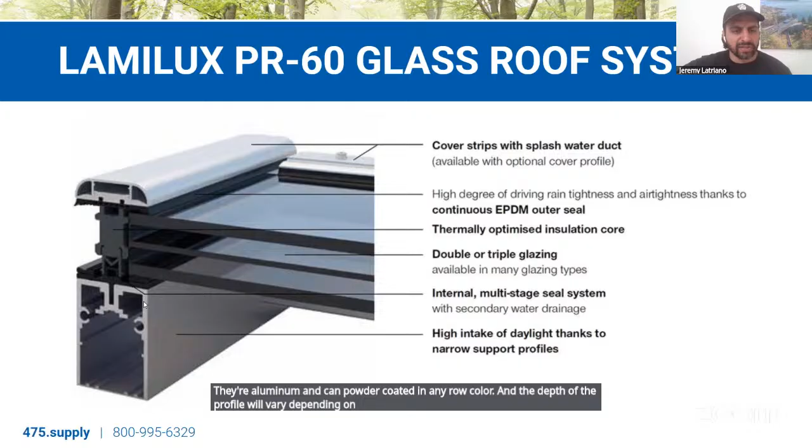The profiles themselves are always 60 millimeters wide, which is where the product name PR60 comes from. They're aluminum and can be powder coated in any RAL color, and the depth of the profile varies depending on the static loads of the skylight assembly. As shown here with various different heights, the 60 millimeter, or 2 3/8 inch, width is maintained. The PR60 is a structural glass roof system, so it can be self-spanning up to about 20 feet, and in those self-spanning applications the only supplementary structure required is the perimeter curb structure.

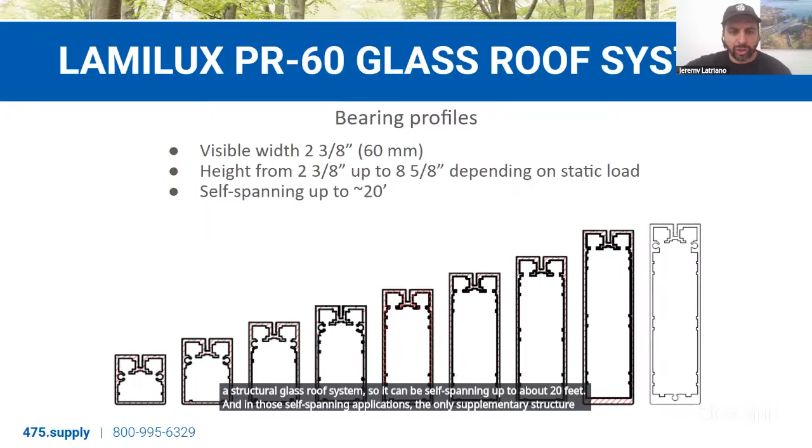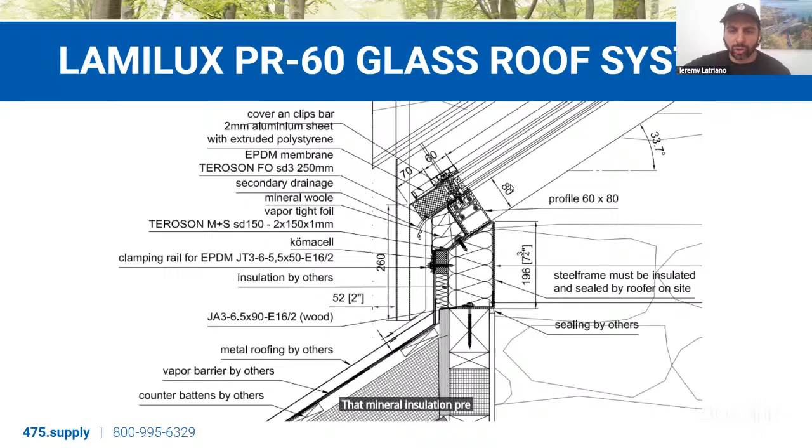Looking again at a section of the assembly, similar to what we saw previously, we have triple layer glazing and thermally broken flashing, in this case with foam insulation pre-attached to this aluminum weather sheet, as Lamilux calls it. Just below that is a mineral wool layer, tied in place with an EPDM membrane, the primary flashing layer at the perimeter of the PR60. That mineral wool insulation prevents heat transfer from occurring through this aluminum profile.

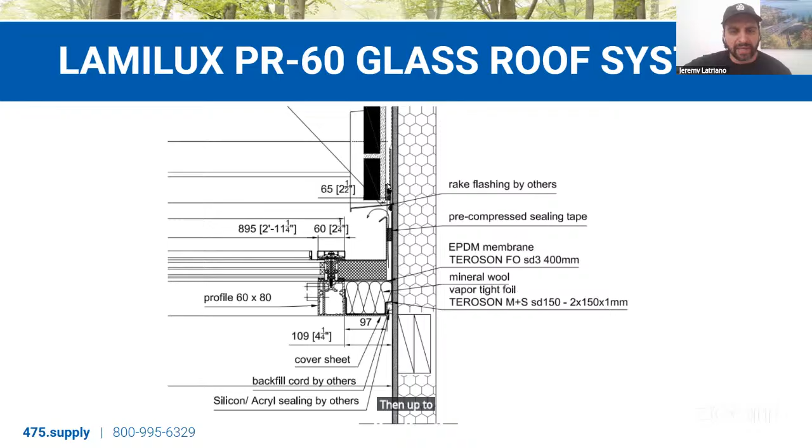These PR60s can be curb mounted, or they can also be mounted to a vertical wall assembly, flashed to that assembly, in which case those same weather sheets, instead of bending down over the curb, bend up to align with the wall, and can then be capped with some sort of counter flashing just above.

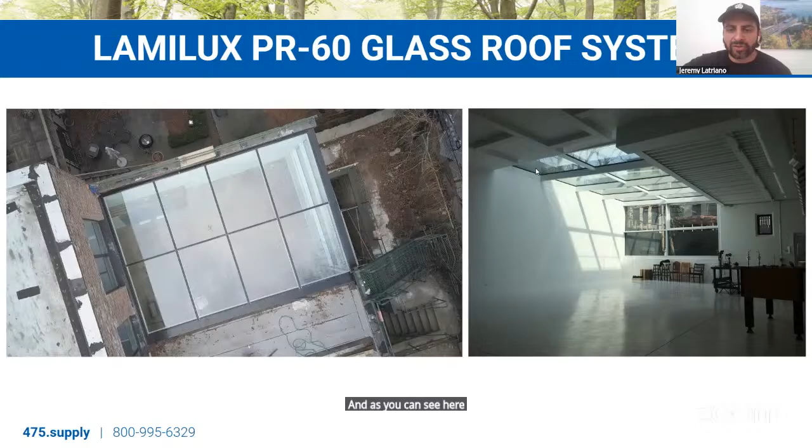As you can see in the image on the right, this PR60 actually has sloped glazing at the roof and also vertical glazing at the wall. I think this image does a really nice job showing how those two elements of the PR60 can be integrated seamlessly and supplied as part of the same scope.

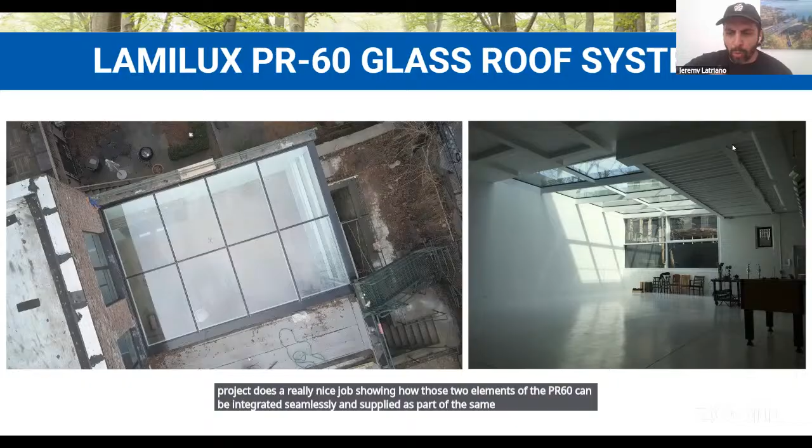The architects of this project, FTP Atelier, designed this really funky, interesting extended pyramid on the roof, over an existing opening, about 30 feet in length by about 10 feet in width. This extended pyramid had some really unusual or uncommon load distribution due to its geometry, and it was a bit of a challenge for LAMILUX to engineer.

However, in the end, we were one of the only manufacturers that were able to realize its design as part of the PR60 glass roof system without really altering it to any significant extent.

Here it is shown at the interior. As part of the design priority for this project, they wanted the different facets of the skylight to match the four different colors of the Poder logo: blue, red, green, and yellow. So as you can see here, we utilized frit, both ceramic and digital prints, to create that effect.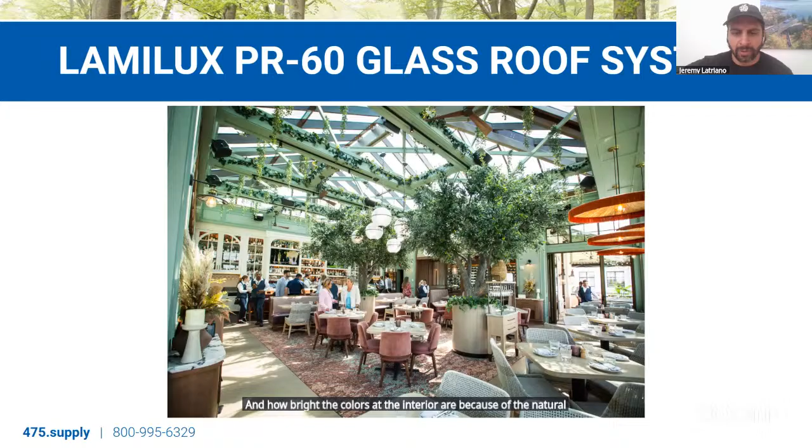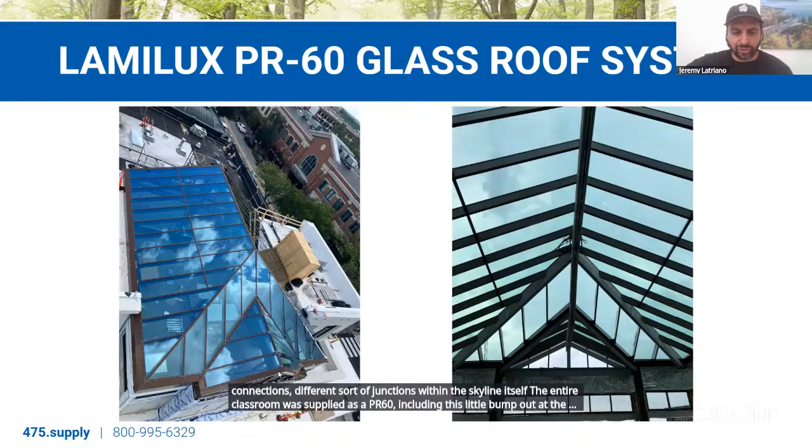Some exterior images. Here you can see that we have a variety of different connections, different junctions within the skylight itself. The entire glass roof was supplied as a PR60, including this little bump out at the front, which also features a vertical gable, which again, the PR60 could accommodate.

So that kind of wraps up the case study. I just want to mention we also supply skylights through FAKRO for particularly pitched roof applications, for slopes typically greater than 15 degrees. These skylights are also pre-assembled, so they are delivered ready to install for the most part. They don't require any assembly on site, so to speak.

They do not have insulated frames, but they have cross-laminated timber frames, which, because wood is non-conductive and because of this cross-lamination, will prevent most heat transfer or significantly reduce heat transfer from occurring through the frames. They have, again, triple pane glazing, and they're typically supplied with insulated flashing kits, which vary depending on the roof type to ensure thermal continuity between the skylight and the surrounding roof construction.

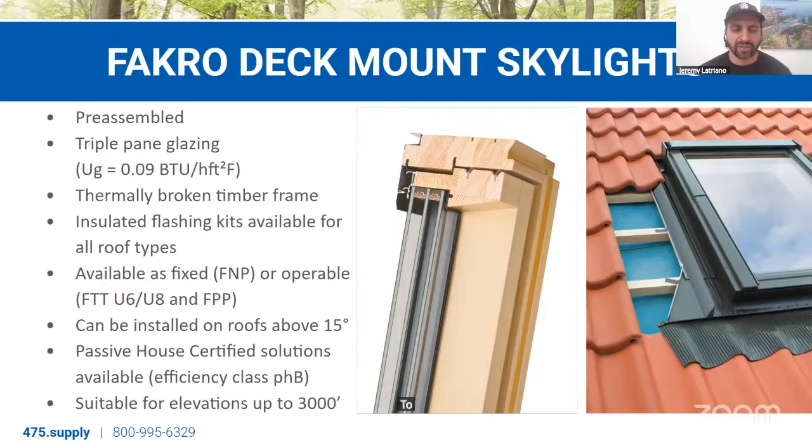These stock roof deck mount skylights are available in a few different varieties. So we have the FNP fixed, which is often available from our inventory with shorter lead times. And then we also have two different options for operability: the FTT U6 or U8 center pivot skylights, and then the FPP top hung skylights.

The LAMILUX skylights, as I mentioned earlier, are curb mounted, but these FAKRO skylights are deck mounted. So what that means is that they're not elevated over the roof structure using a curb. They're installed essentially directly to the roof deck layer or to the battens in the case of a ventilated roof, which provides a lower profile, sometimes more desirable, particularly for pitched roof projects or smaller residential projects. Here we can see how that skylight would be embedded or installed in a timber roof structure.

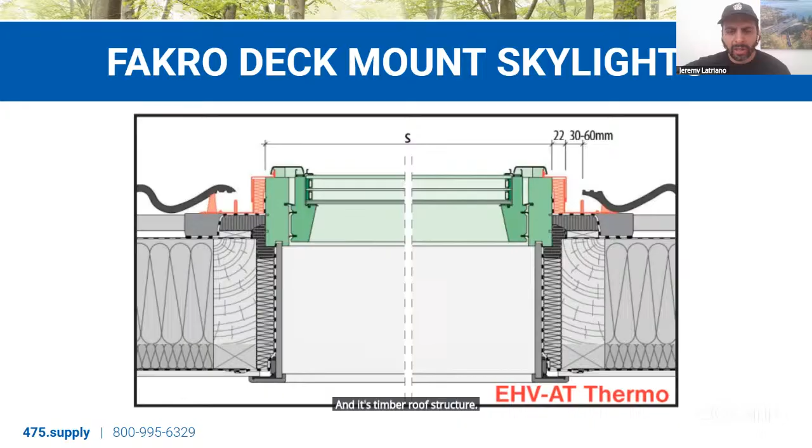And one last product to send you home with—certainly very specific, but a question I get pretty often is, can we supply walkable skylights? The answer is yes. FAKRO does have a walkable skylight product available in sizes up to about 4 foot by 4 feet, with a frame and glazing designed and engineered to sit flush with the roof deck, ideally suited for walkable or accessible roof deck applications.